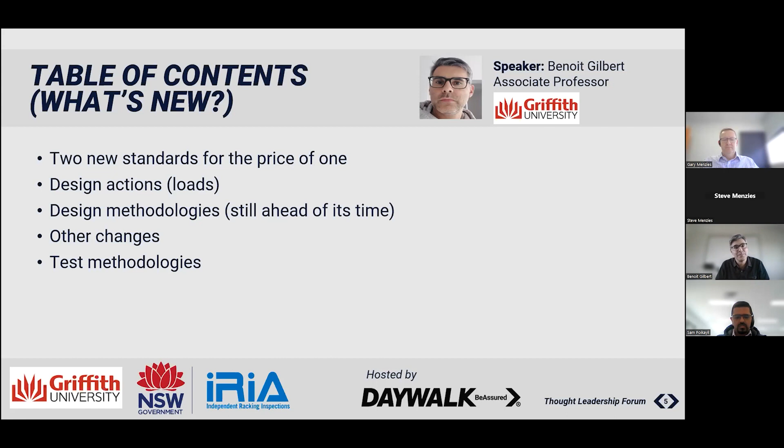So in the revision of 4084, it was decided to break down the standard into 2 parts. Part 1, which is only about the structural design - what I'm going to talk about - and Part 2, which is all about inspection, installation, tolerances, clearance, and maintenance that the other speaker is going to mention. So we're only going to be on Part 1 this time. Next slide, please.

So the main change we saw in the video today is getting some clarification for the wind and seismic design actions. Before, all those actions were referred to the common Australian standard for buildings. Now storage is a bit more specific - the type of load you have will affect energy damping in your racks if you're storing frozen goods or liquids. That's now taken into account in the standard. Same thing for wind.

If you're designing clad racks, we've got design actions - how the loads are acting on the buildings, which is very specific to racks for safer products. Also, what's interesting now is the design life of the racks has been clearly specified in the standard.

Of course, if you design a rack for a longer period of time, you've got more chance to get a seismic event, more chance of high wind. So you need to adapt your load depending on how long you're planning your structure to last. Now that's clearly specified. Can we get the next slide, please?

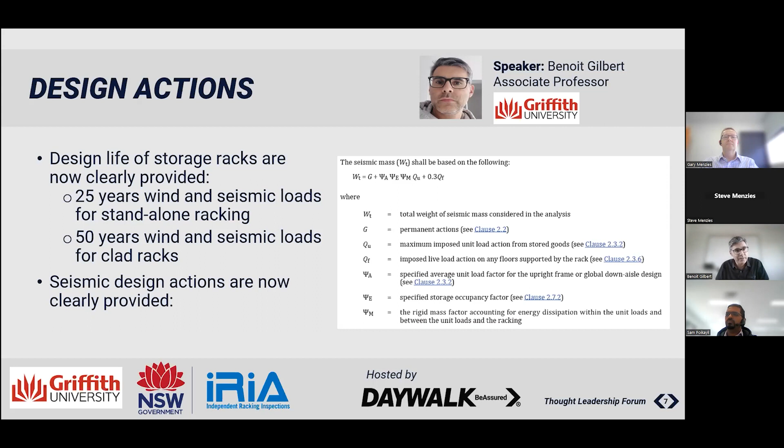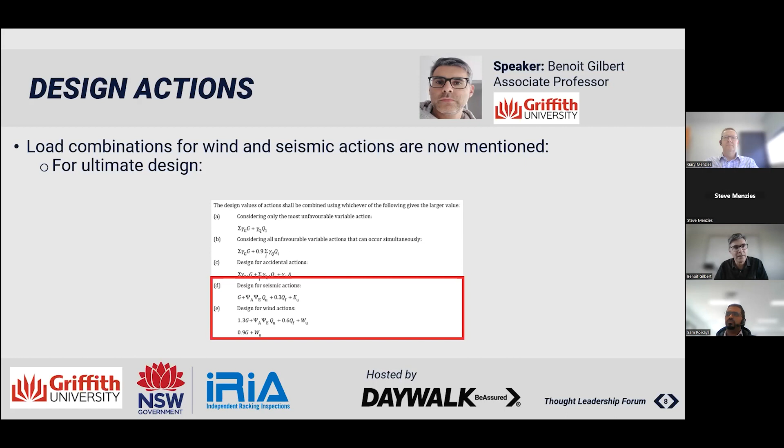When you design your structures, you need to combine - and I'm going to show some tables - the self-weight, the wind, the seismic, the pallet load, different loading patterns. You need to combine them to make sure your structure accounts for every single aspect that can occur during its life. Now we've clearly specified how you need to design for wind and seismic load, both for strength and for deflection.

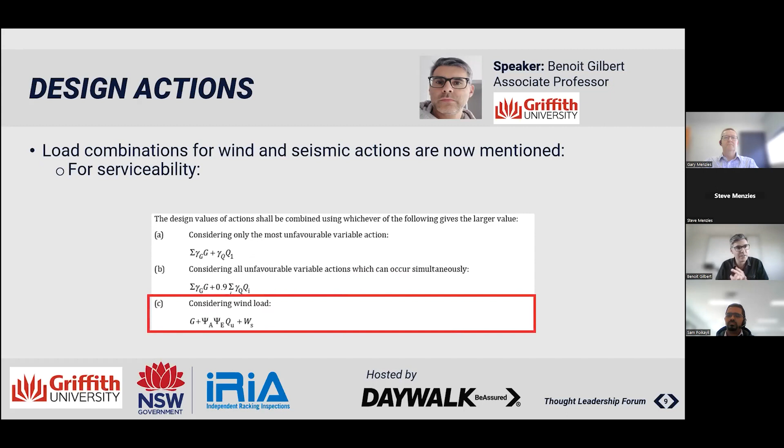Next slide, please. I just want to give an overview, not look at every equation. So the next few slides show all the different combinations of load a designer needs to consider when designing a rack - a lot of different load combinations, a lot of different cases to look at. This clearly specifies what was noted before in the standard, showing it's a very complex engineering process behind designing racks.

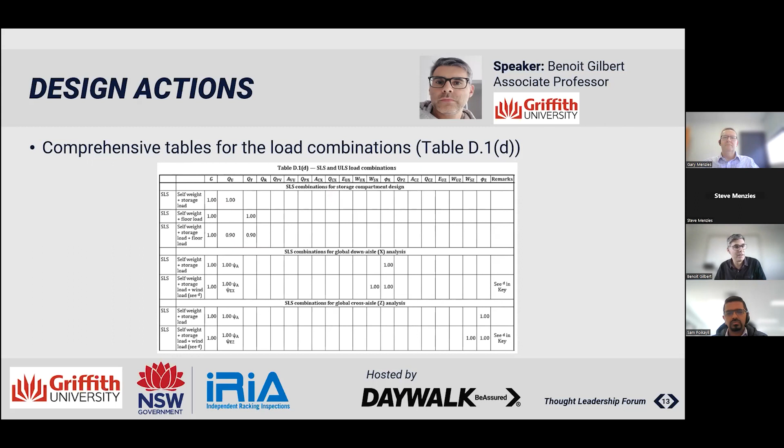Other changes as well include how imperfections are considered in the design. You get some looseness when you install a rack - you already have a bit of imperfection, and that's very important in terms of design, because if your rack is slightly at an angle, you have more chance of overturning. So you need to consider that in your design, and the equation has been updated to get a more precise value for the imperfection.

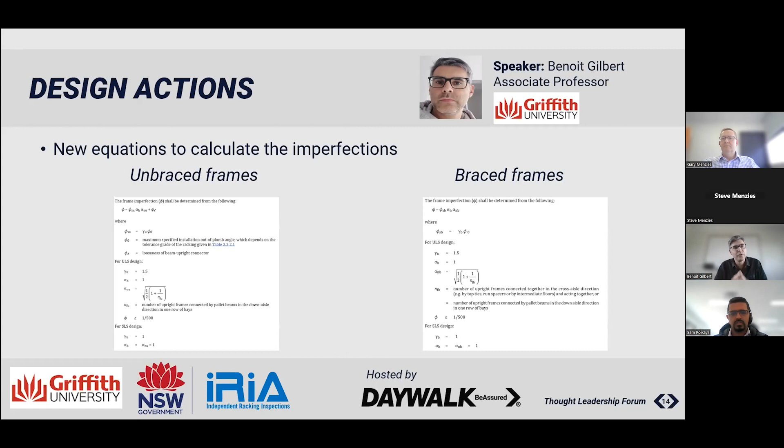Okay, so the design methodology as well. The Australian standard is extremely advanced in terms of the design methodology it's using. You've got two ways: you can use an extremely simple design method, which is going to be quite conservative, or you can go to a very advanced method where it allows the designer to basically draw the rack in CAD, with the CAD exporting everything into design software, and all the calculations done automatically. So it allows, and this is a very unique standard in the world, to go from simple design method to very advanced method where you can really optimize your system.

It's also using, similar to the cold form steel standard in Australia, a design method called the direct strength method. This is only used in the US and Australia, not in Europe, and it's a much better and more accurate design method than the one used in Europe. And because storage racks have some perforations, it's very tricky to design. So the 4600, which is the cold form steel standard, has been updated, adding more effect on the perforation in the design, and that's now been translated into the storage rack standard as well. So it's basically extra safety, more accurate design rules.

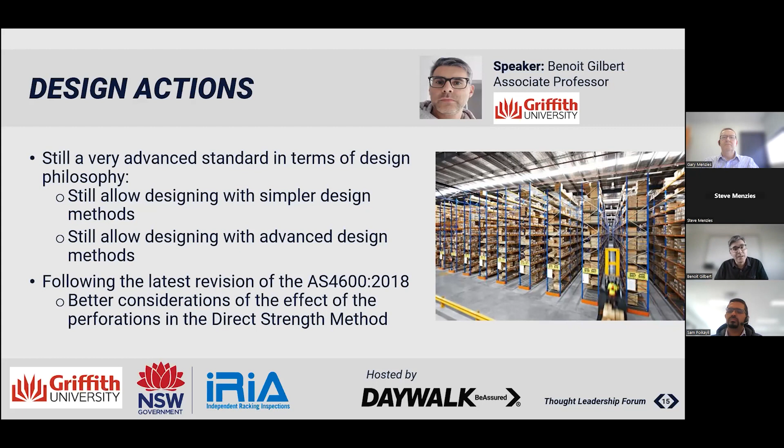Okay, a couple of limitations have also been removed from the standard. One is the anchor designs - they've now all been removed from the standard, which leaves a bit more freedom for the designer to design according to the manufacturer. And the interesting part with designing racks is that you base a lot of your design values from tests, because it's a very complex system. So you get a lot of design value from tests, which is expensive to do. So some more analytical solutions have been provided, so you don't always have to do the test, but at least for some parts.

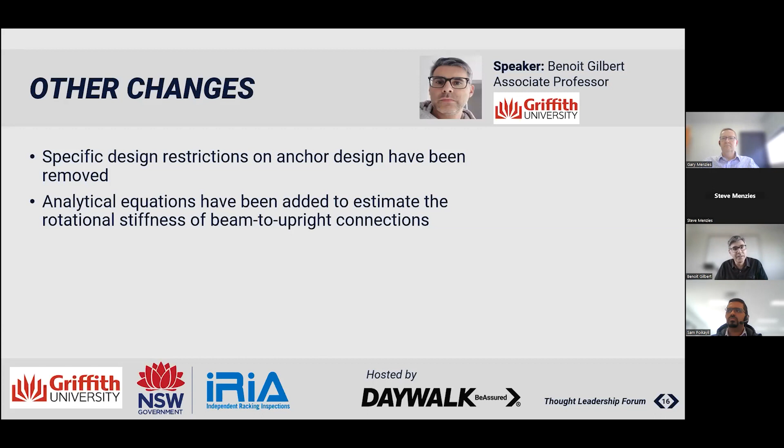Next slide, please. So we also improved some of the testing methods. As I was saying, you need to get a lot of values from your tests that you're going to input into your design. Some of them are the stiffness between the upright and the beam, the stiffness of the frame, and we're actually giving some more methods to calculate the looseness, because the looseness of your connection determines how much your rack is going to lean one way. So next slide, please.

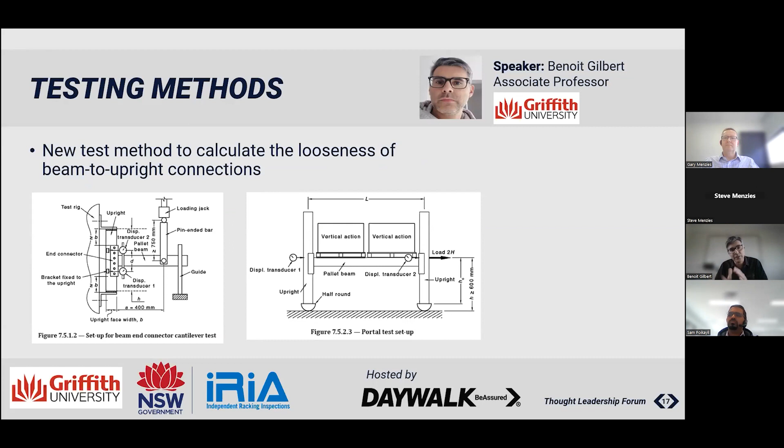And this one is quite important if you've got some racks under wind. The rack is going to deform in the down-aisle direction. So we improved the way you can calculate or measure the stiffness of the rack in the down-aisle direction, which could be important if you've got very tall racks subjected to wind. So you could actually get a more precise value of the stiffness and design your racks more accurately if you prefer. Next slide, please.

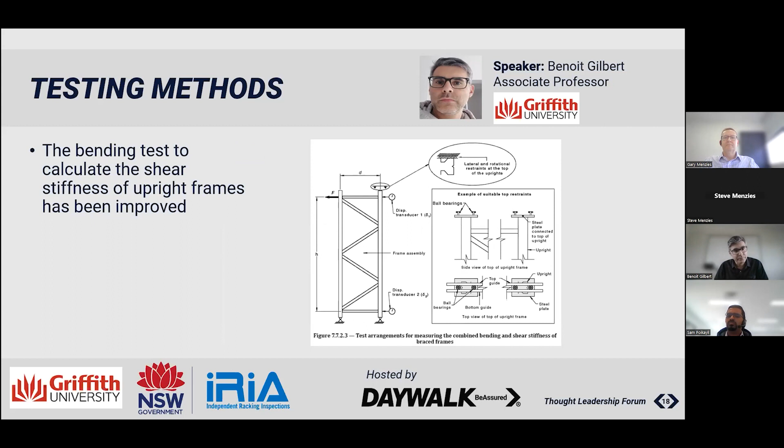All right, so just to summarize my talk, there's not a lot of changes apart from dividing into two parts, but on the design part the changes are not drastic. It's just more precision - considering wind and seismic design actions, improving the equations to consider perforation in the racks, and improving some of the test methods. One thing I want to repeat: this is the most advanced standard in the world for racking, and designing racking is very, very complex. So you really want to ensure that when you buy a rack, it's designed correctly - you need to rely on people with experience who know how to design storage racks.

Thank you, Gary. Back to you.

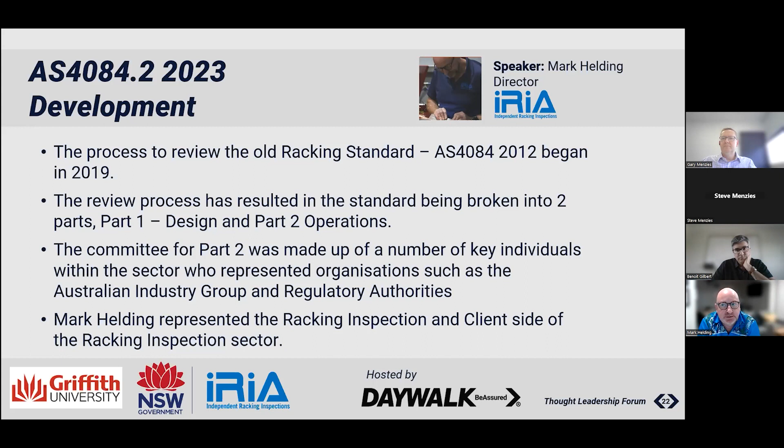One of those elements, which is a theme throughout, is the notion of competency. The standard refers to competency at a number of different levels, and it's a new element to standards in general, but particularly for 4084 Part 2. I know Joseph will talk about it as well, because this links back to the different legislations around the country.

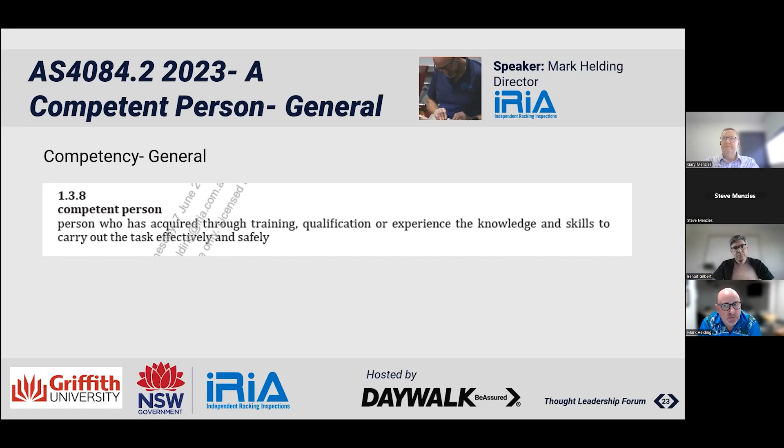So competency exists, as I said, at a number of different levels. Annual inspections is one of those - the person undertaking your annual inspection really needs to be qualified to be doing that. They need to have worked in the industry, been a designer or engineer or similar. They need to understand the racking they're looking at, the specific brand, and also technically or theoretically should be able to oversee an installation or repair.

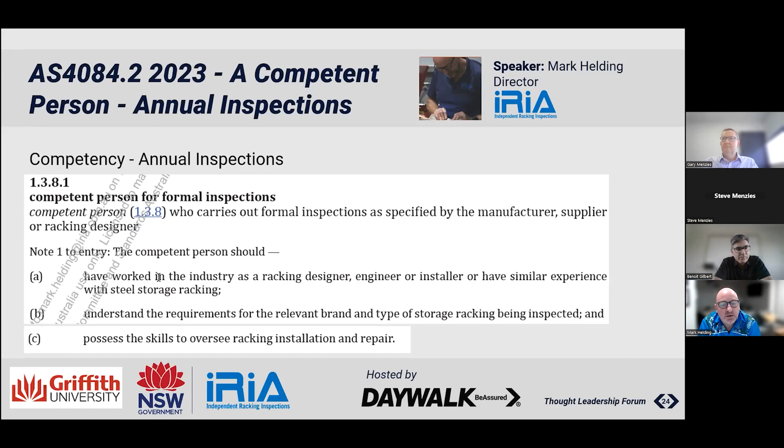Competency also exists at a repairer level now. Basically what the standard is saying is that if you're going to have someone come onto and work on your system, they need to be competent in that system. So from that perspective, it's now an element that is referred to in the standard. I know Joseph will talk about that to some extent in his presentation.

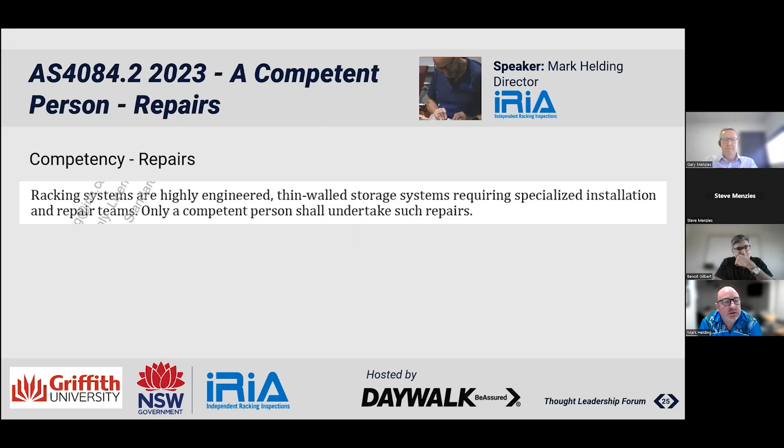So notionally, the formal inspections component has been beefed up, and in essence, formal racking inspections need to be undertaken every 12 months. They can be undertaken in shorter periods - for example, 6 monthly, which some clients do - but the reality is they need to be done every 12 months.

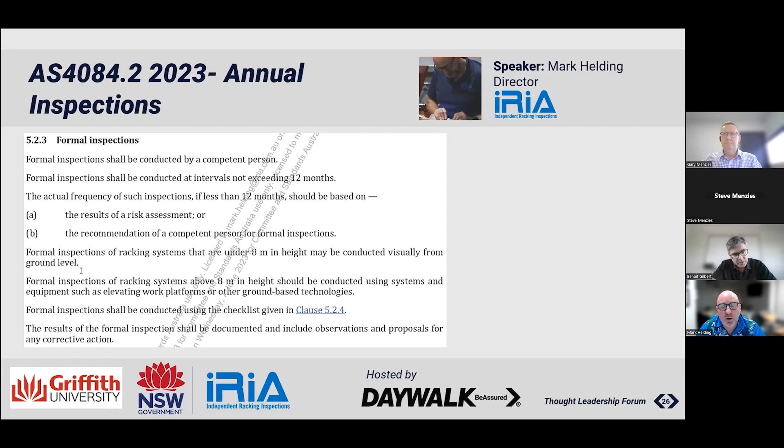We have in the past done some inspections with drones, and we found that technology quite useful for doing inspections at height. It also introduces the notion of a checklist, which is part of the standard for things that should be checked. And importantly, all inspection elements or all inspection items should be reported.

There's also now a notion of informal inspection. As the operator of a racking system, you should be able to demonstrate that you are assessing your racking system yourself on a very regular basis - that could be monthly, weekly, or fortnightly. Either way, you should be able to demonstrate that you're checking the system beyond the normal formal inspection you have done.

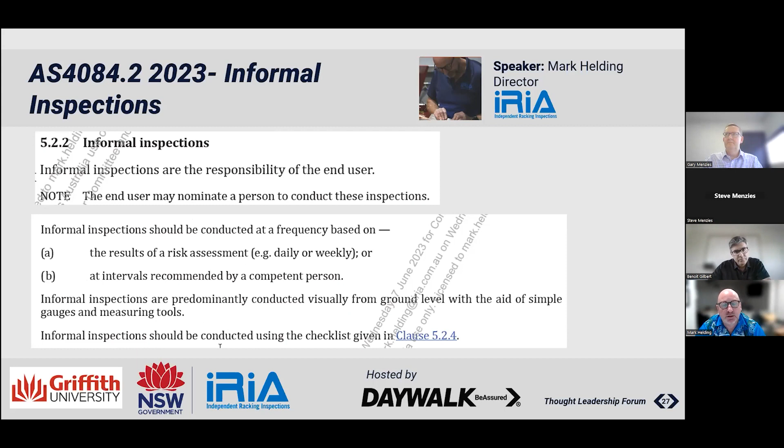So retrospectivity is an interesting concept. We have this all the time with standards as they change, and that was the case with 1993 to 2012, and we now have that as the case again. It's a practical thing as much as anything else.

In this instance, notionally under the new standard, load charts have new requirements. So if you're putting a load chart onto a racking system installed today, the requirements would be fundamentally different to what they were if it was installed in, for example, 2015. But there is no expectation that, based on the new standard, you would go back and revise or remove and replace all of the load charts installed on your racking system if it was installed in 2015.

There's a number of key caveats to that. For example, racking systems now need to be inspected every 12 months. That is a retrospective thing - it will follow through the racking system, regardless of its age.

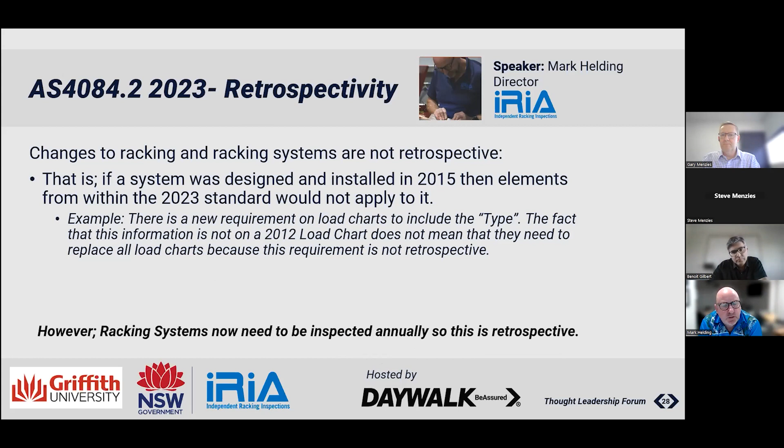As I've pointed out, there's a lot of detail in the new standard, and I'm really only trying to touch on the key elements that, as operators, you should be aware of. There's new damage types that have been included in the standard or expanded upon.

So beams, for example, in the old standard were identified ostensibly around permanent deflection and stuff like that. However, as we know as operators, there's a range of other things that can occur to racking systems around the connectors, dents in beams, and anyone that's worked around racking will know that these are fairly common. So now these are identified within the standard. If you've had a formal racking inspection program in place, an annual one, most of these things would have been picked up and identified in your racking reports.

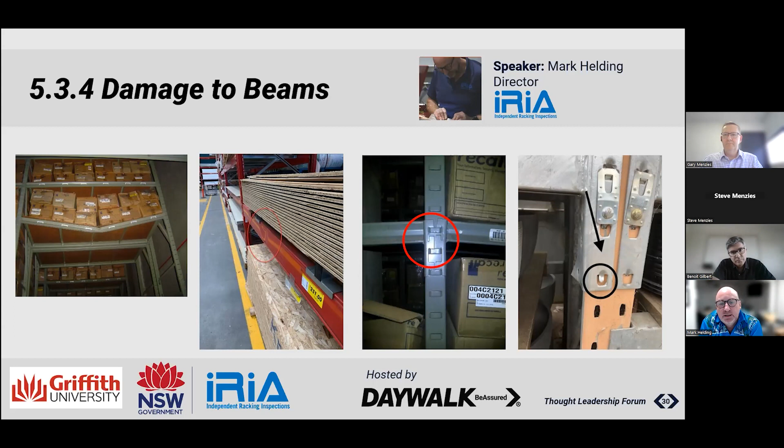Twists is a new one that's been included. It's a common thing in Europe to be included. Within the Australian standard, it's notionally referred to around a clock type system, which is the way it's been included in the current standard.

Just as a way of interest, of the 95,000 records that we collect annually, it's probably number 2 on the list of damaged items that we find. There's not a lot of testing data around twisted uprights and what happens to an upright.

We were curious ourselves as to what happens to a twisted upright. So some 2 years ago, we completed our own tests around introducing various amounts of twist to an upright to see what it does to a member or an upright when you load it up. Interestingly, what we found was that the more twist that you introduce, the more unpredictable the behaviour of the upright is. In effect, it can collapse without any indication of buckling or anything else. It just basically collapsed.

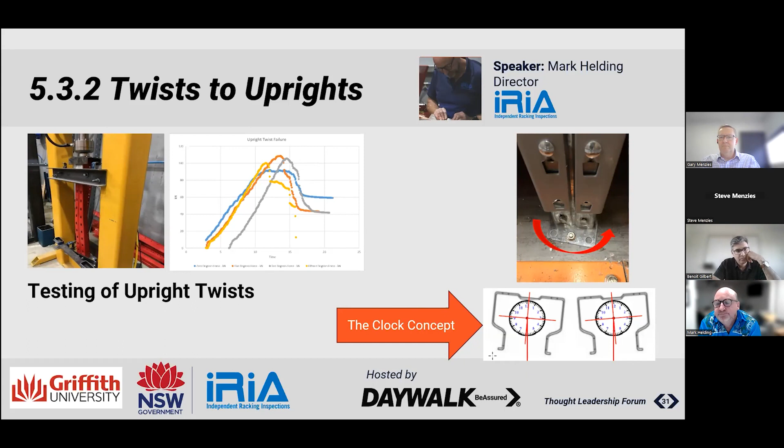There's been some halo changes, or what we call halo, the spacing around a pallet. Above 6 metres, there's an extra 25 millimetres that's been added to the spacing on the halo. If you've got an existing racking system, it's not a thing - there's no expectation that you go and move every beam above 6 metres up 25 millimetres. So from that perspective, if you're putting a new system in, that would need to be considered.

The other thing that's now been included is the notion of types of pallets. So you see there in the picture, there's fanning, bulging and overhanging pallets. They all impact upon the halo, or the spacing around the pallet, in the racking system.

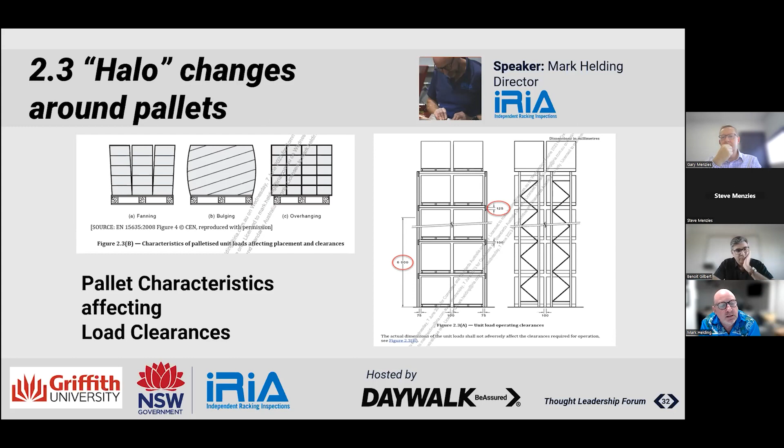One of the things that has occurred, or does occur, is what we call the reworking of uprights - uprights that, in extreme circumstances, have been smashed back into shape with a big mash hammer or similar. But similarly, there's been instances where bits are added to uprights to, in theory, strengthen them or rework them, as we call it.

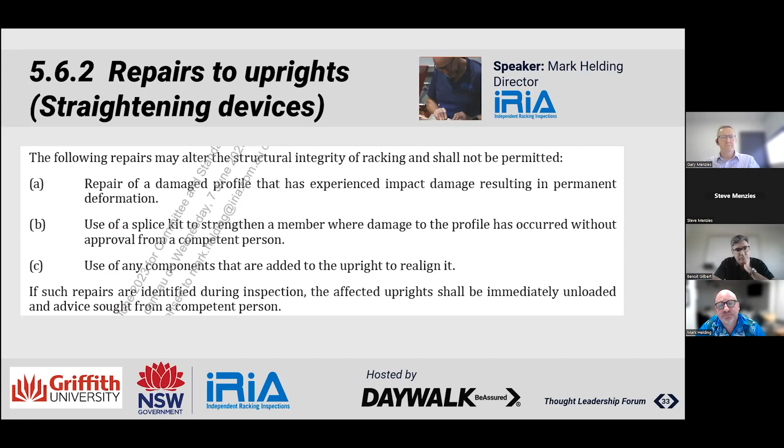So a number of instances here of reworking that has occurred. Now, from our perspective, we're not saying that these are incorrect or otherwise. It's that a competent person needs to sign off on these. My advice to clients is: if you include these things in your system and something was to happen, how have you managed your risk, or how are you going to manage your risk? I always look at it from the perspective of - I'm standing in front of a judge, how do I explain what's happened here? So it really comes down to your appetite for risk and what you want to check.

That said, repairing uprights is a hard job, and it's not easy to complete, and it is a nuisance within the overall management of a racking system. But I guess the point is you really need to do it right.

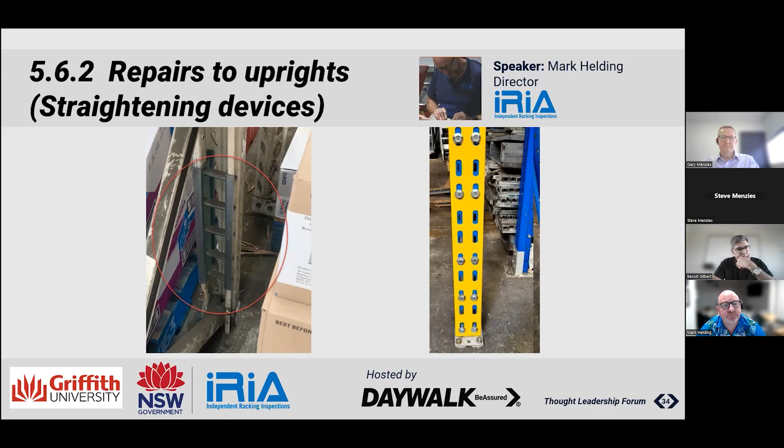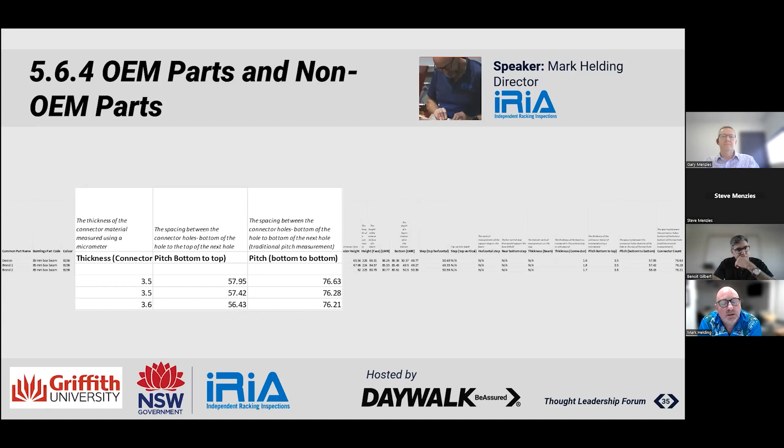So in this instance here, I've just highlighted something. When we do measurements, for example, here we've got 3 different types of beams. One of those beams is an original part versus the other 2 being non-original, and you can see there's very slight differences between the spacing, the pitch between connectors.

Now, whilst that in itself might not seem like a lot, in the instance where you insert a beam in, you might find that because of those very subtle differences, you only have 2 connectors that are permanently in touch with the upright, in the hole. So in effect, if you think you've got 3 connectors that are fully engaged, you've actually only got 2, or in worse instances, you've got 1.

Now, what happens in those scenarios when you load an upright up, the connector that is fully engaged acts like a knife and actually will slice through the upright, which is what we found in a number of instances. So from that perspective, all I'm highlighting is the fact that if you're using non-OEM parts in an OEM system, there's some risks associated with it.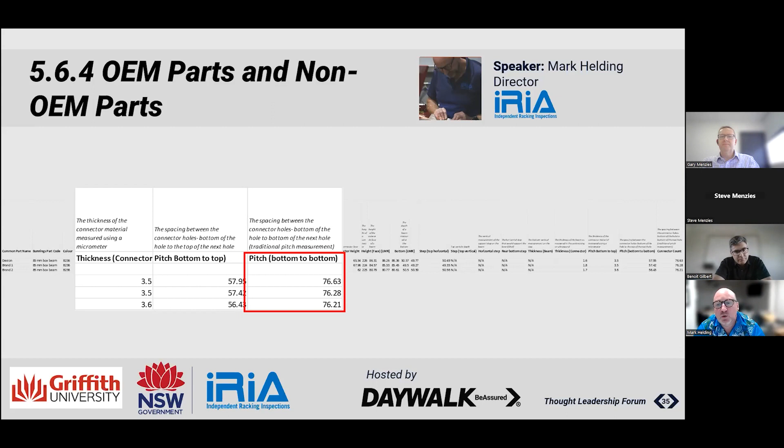The standard is referring to that here. And you'll see from this, with some testing we've done, the connection between a Dexion beam and a Dexion upright is considerably stronger than a non-Dexion beam to a Dexion upright. So from that perspective, what we're saying is that there's testing data to prove that the connections are better between OEM to OEM. And that kind of makes sense because they're making beams for their own system.

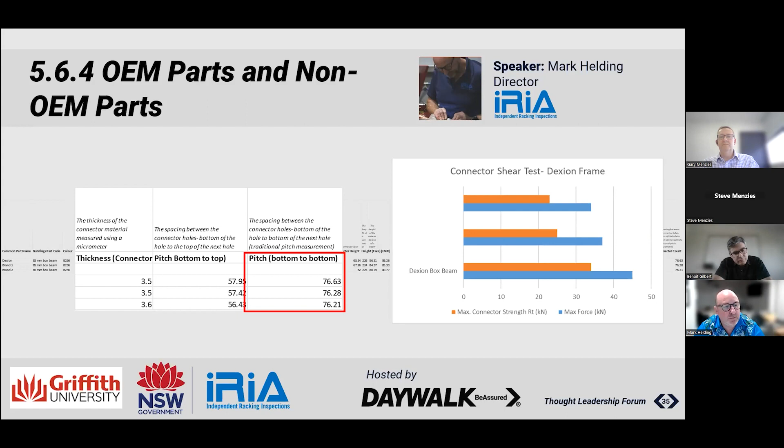So there's been a change to load charts. There's a number of key changes, but the new standard requires that the design grade, which is a specific design requirement, is included on the load chart. So effectively, someone can go backwards through the design process and understand under what circumstances the racking was designed for.

The other change is that handwritten charts are no longer part of the standard. We've had a number of instances over the years, particularly in the last 18 months, where people have bought racking off the internet and had blank load charts sent out to them, even to the extent where the people who sent out the racking refused to provide any loading data on the load chart. So basically, you could put whatever you like on the load chart.

So with the new load chart, the new standard says they can't be handwritten, and they must be a standard size, and the location of them needs to be relevant as well.

Interestingly, if you choose not to go with load charts, there are other ways now of being able to demonstrate what loading you have. Those that are warehouse people will understand that the warehouse management system might be able to cope with that. For example, a known slot within a warehouse location will have a loading capacity. Advanced shipping notices might let you know what that pallet has on it that's coming to you, and the warehouse management system can manage the allocations to that slot.

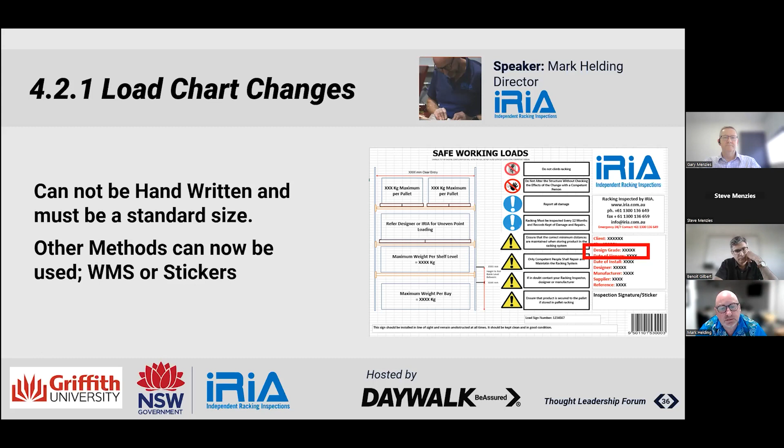Another key one is that inspection records need to be kept, and they basically need to be kept for the life of the racking system. Effectively, what the standard's referring to is that you need to be able to demonstrate that it's been inspected, repaired, returned to service, and then inspected again. So you need to be able to demonstrate that there's a history of maintenance on the racking system. Effectively, it's just bringing it into line with the notion of plant under the workplace legislation.

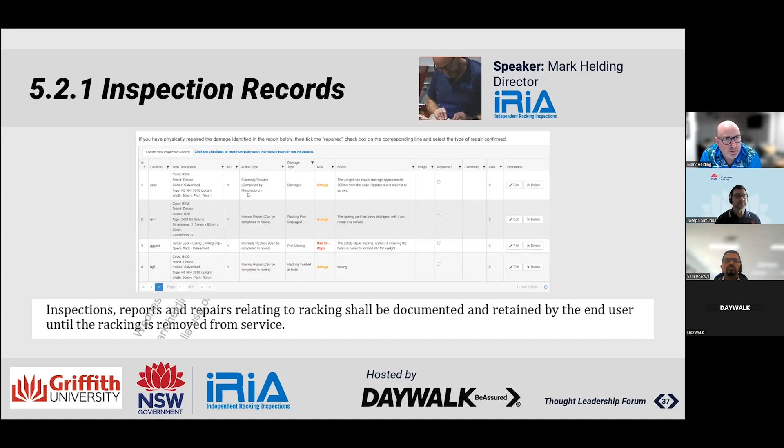Then the introduction of corrosion has been brought into the standard. This is particularly around base plates and the lower sections of uprights, which for those that work around racking systems outside will know is a problem. Interestingly, the standard, which I haven't got in here, also says that only galvanised racking should be outside. So it's brought that into line with what the industry expectations or industry best practices were around that. So basically now there's a corrosion element there.

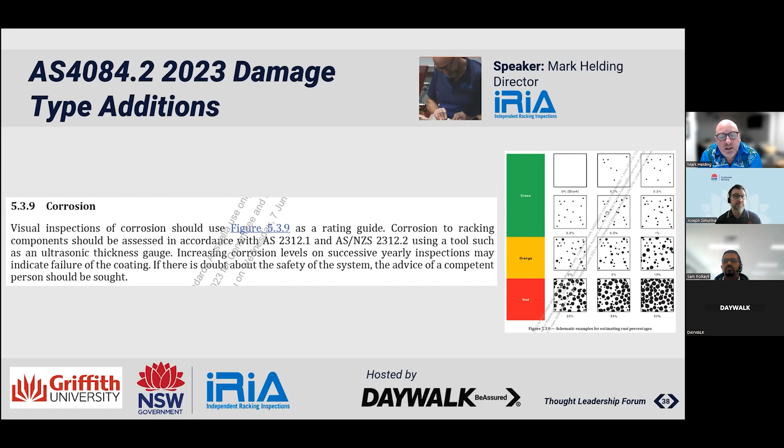So if I was to leave people with a one-pager on what they need to do: make sure that there's an informal inspection process, so you're at the very least doing your inspections monthly, maybe fortnightly. This is usually best done alongside an annual inspection report, where an annual inspection is completed and they leave a report behind. You'd be working on the racking system, constantly trying to maintain it, and the informal process is part of that. You've got to ensure that you've got in place an annual racking inspection as part of a perpetual, overall process for your racking system.

You need to make sure that only repairers, only people who come onto your racking, are competent, so they need to know what they're doing. Don't let people work on the racking system that are not familiar with it or not familiar with what to do. Consider new load chart requirements for the load carrying capacity of your racking, and consider the notion of non-OEM equipment as well as unconventional repairs to your racking system, as part of your overall risk assessment of what you're doing.

So back to you, Gary. Thank you.

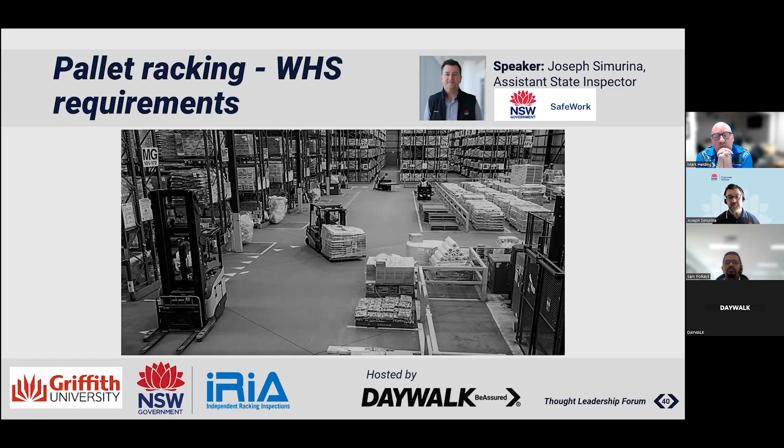So how does it apply? The three-tiered framework of the work health and safety laws includes the Work Health and Safety Act, which is a framework to protect the health, safety and welfare of all workers at work and of other people who might be affected by the work. The second level is the Work Health and Safety Regulations, which specify the way in which some duties under the Act must be met and prescribe procedural or administrative requirements to support the Act. The third level is the Codes of Practice, which provide practical guidance on how to meet the standards set out in the Work Health and Safety Act and Regulations, otherwise known as legislation. These are admissible in proceedings as evidence of whether or not a duty under the Work Health and Safety laws has been met. The codes of practice are not mandatory, provided any other method used provides an equivalent or higher standard of work health and safety.

I should also note that work health and safety laws have been implemented in all jurisdictions except Victoria, which is still operating under the OH&S laws. So for any participants listening today from Victoria, please refer to your local OH&S laws and apply the relevant sections. Next slide, please.

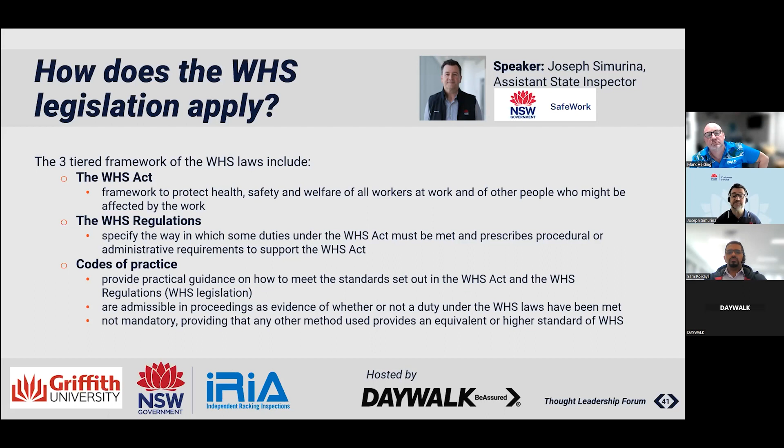So the definition of plant in work health and safety legislation includes any machinery, equipment, appliance, container, implement, and tools, and any component of any of those things, and anything fitted or connected to those things. So plant includes items as diverse as lifts, cranes, computers, machinery, conveyors, forklifts, vehicles, mobile plant, and pallet racking. Next slide, please.

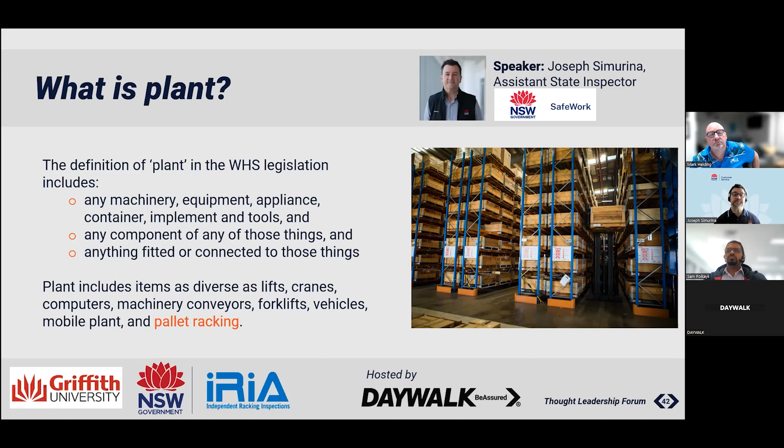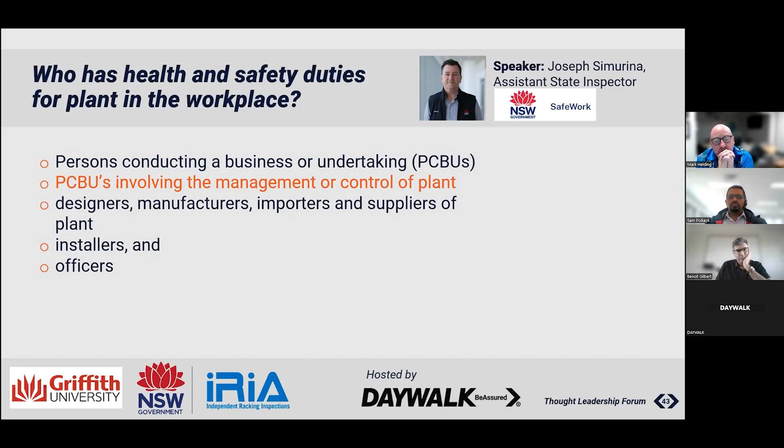Who has health and safety duties for plant in the workplace? Well, persons conducting a business or undertaking, also known as PCBUs. Secondly, PCBUs involving the management or control of plant, which is the focus of this presentation. Thirdly, designers, manufacturers, importers, and suppliers of plant. And also installers and officers. Next slide, please.

A PCBU involving the management or control of plant is also referred to as the person with management or control of plant, or PWMC, is the abbreviation that I'll be using.

The main clauses of the Work Health and Safety Regulation that apply to a person with management or control of plant can be found under Division 7. They are Clause 203, Management of Risks to Health and Safety, under Part 3.1, which states that when managing risks to health and safety, if a duty holder cannot eliminate those risks, they must minimize those risks in accordance with the hierarchy of risk controls, which is substitution, isolation, engineering controls, administrative controls, and PPE.

Clause 204 is titled Control of Risks Arising from Installation or Commissioning. The person must not commission or decommission the plant unless the plant is without risks to health and safety, and that installation, assembly, construction, commissioning, etc. is done by a competent person.

Clause 205 covers preventing unauthorized alterations to or interference with plant. So the person must prevent alterations to or interference with plant that are not authorized by the person.

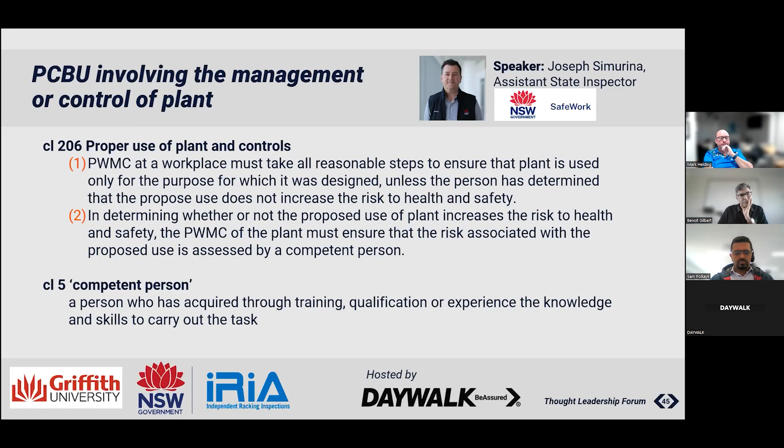Now, the definition of a competent person is found under clause 5 of the Work Health and Safety Regulations. While there are various definitions under clause 5 for a competent person, depending on the type of activity being undertaken, for pallet racking, the general definition applies: a person who has acquired through training, qualification, or experience the knowledge and skills to carry out the task. Next slide, please.

If we look at clause 213, maintenance and inspection of plant, it states that a person with management or control at a workplace must ensure that maintenance, inspection, and, if necessary, testing of plant is carried out by a competent person. The second part is that the maintenance, inspection, and testing must be carried out in accordance with the manufacturer's recommendations, if any, or if there are none, in accordance with the recommendations of a competent person, or in relation to inspection, if it's not reasonably practicable to comply with paragraphs A or B, then annually. So a competent person may prescribe the requirements of maintenance and inspection for racking if there are no manufacturer's recommendations. A competent person may also refer to an applicable Australian standard, such as AS 4084 Part 2.

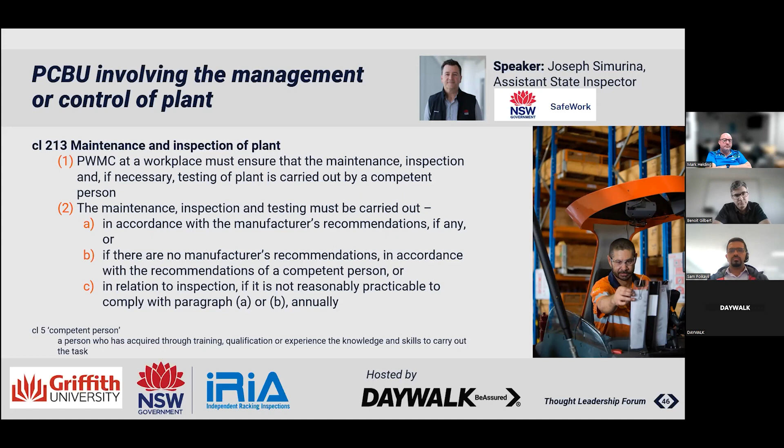So what are the role of standards and other guidance documents under Work Health and Safety? Under Work Health and Safety legislation, there are some things that you must do, i.e. they're mandatory, and other things you must do so far as is reasonably practicable. Complying with the code of practice effectively means complying with legislation. A few standards are mandatory in the Work Health and Safety regulation.

However, most standards, including AS 4084, are not mandatory. Conforming to a standard, a guide, or a fact sheet or information sheet does not guarantee compliance with Work Health and Safety legislation. However, a court may consider that conforming to a standard was relevant and that it was reasonably practicable for a person to conform to the standard in the circumstances. A Work Health and Safety inspector may also refer to a standard to identify what is known or can reasonably be expected to be known about hazards and suitable control measures to eliminate or minimize risk.

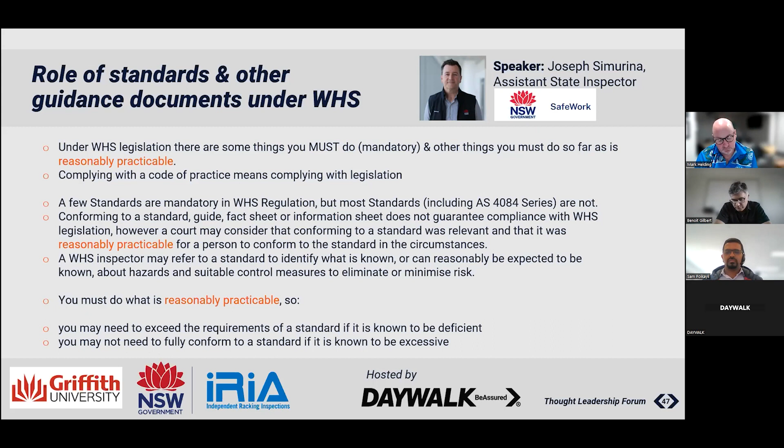And you must do what is reasonably practicable. So you may need to exceed the requirements of a standard if it is known to be deficient, and you may not need to fully conform to a standard if it is known to be excessive. Next slide, please.

So for more information about finding the Work Health and Safety regulator in your state, go to the SafeWork Australia website, click on the Find Your Regulator link, and that will take you to a page with a list of work health and safety regulators in each state of Australia. Once you have gone to the relevant regulator's page, simply search codes of practice, and you will get a list of codes of practice in your state, and then you just find the one that relates to plant. Thank you.

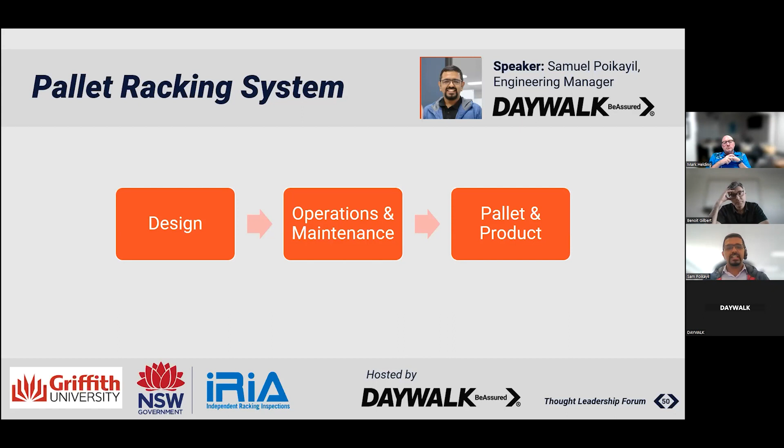But before we jump in, let's just have a quick poll related to the racking applications. Just give it a few more seconds. Well, thank you for your time.

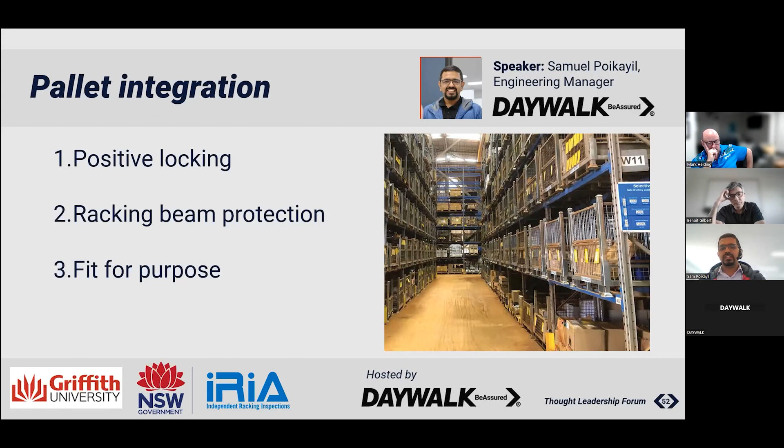So let's talk about the three aspects of pallet integration. The integration of the pallet and the pallet racking beams is most often overlooked, but it's quite critical. The pallets also play a key role in maintaining and prolonging a compliant racking system. Some of these methods are by providing a positive locking system, racking beam protection, and fit for purpose design. Let's investigate them a bit more briefly.

Positive locking of a pallet simply means that the pallet not only rests on top of the beams, but is also locked onto the bearers to prevent the pallet from sliding off. Currently, Australia, being focused on safety, is a leader in its unique focus on the positive locking of pallets and cages into the racking beams. Of note, the updated standard also gives guidance on the effect that seismic activity will have on a variety of different packaging styles. To take it further, please contact a competent person for specific advice.

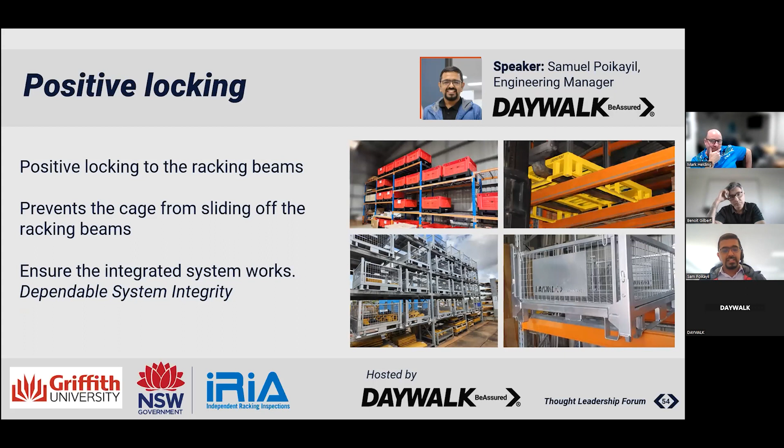Apart from positive locking, some pallets also provide for self-alignment to the pallet racking beams with guiding contours to locate the pallet snugly. A compliant pallet must be certified to bear the rated loads at the point of contact while being stored on racking beams. Next, we'll look at a potential outcome of the positive locking.

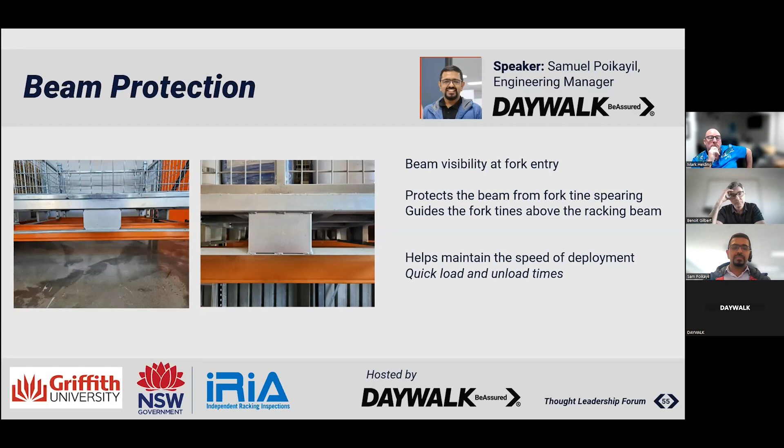A potential drawback highlighted by the need of a positive locking system is the exposure of pallet racking beams from the pockets of fork tine entry. This potentially exposes the beams to be damaged or speared by the operation of the fork tines while loading or unloading. To address this concern, there are available special pallets which are designed with a gradient or a camber as part of the underrail, which may help deflect these fork tines at the entry to protect the pallet racking beam. This is especially helpful in applications where the racking beams are not easily visible during operation. Lastly, let's look at some of the fit-for-purpose pallets.

A compliant or certified racking is not just a wildcard pass to simply use, unload, and store any goods or products. On the contrary, it's a constraining application governed by load charts attached to the racking beam systems. Essentially, compliant use of pallet racking systems is guided by an adequate understanding of the load rating per level of the racking.

Apart from load rating, the chart also specifies contact types for which the racking is compliant - whether it's a uniformly distributed load, or comes with multiple feet or concentrated feet. There are a variety of pallet types available based on requirement, and with heavier pallets, like steel ones, it's beneficial to have the tare weight of the pallet indicated to be included in the SWL limit confirmations.

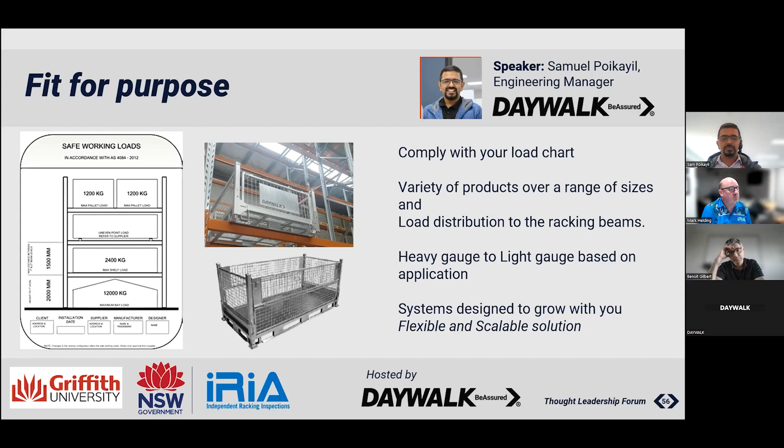Finally, just to sum up, compliance is not about using whatever is available to store a product. It's about working the entire system correctly within the limits of application to gain the benefits of the system and develop it from there. Having a certified or compliant racking does you no good if you misuse the pallet, product, or application. Compliance must be met by the racking system in its entirety.

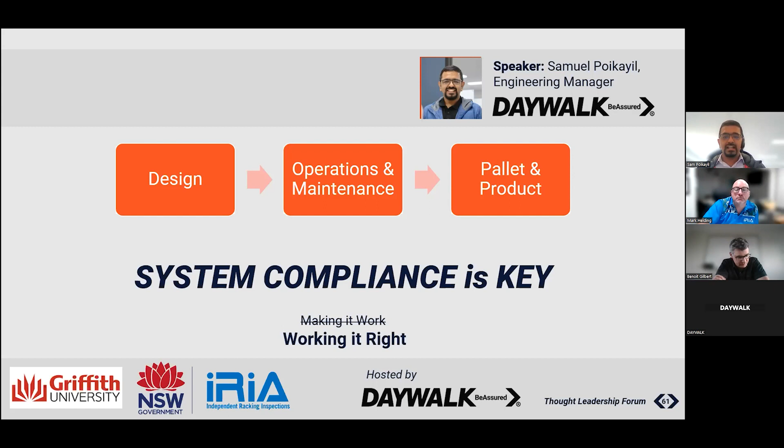Thank you, Sam. Appreciate the insights that you've shared and the important points you've covered in relation to storage mediums and product. There's one thing I'd like to say, which is perhaps a question already raised in the Q&A: are we saying that any racking that was erected prior to 2023 must be dismantled and new racking put up?

The answer is no, not necessarily. However, if you're putting in new racking or changing your racking, you want to ensure that you engage a competent person in this process.